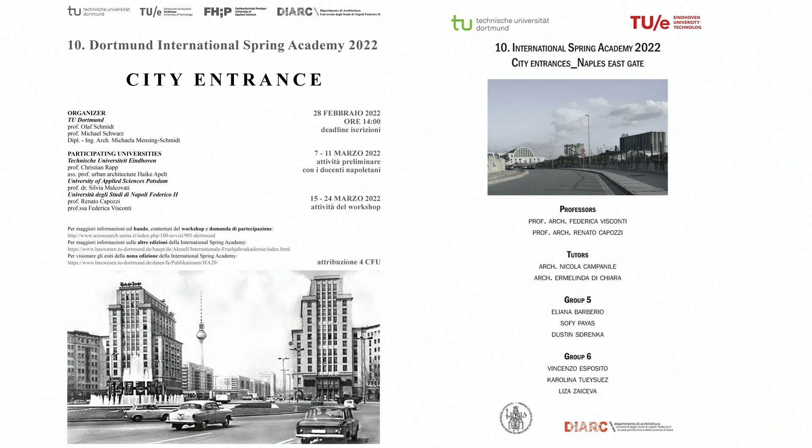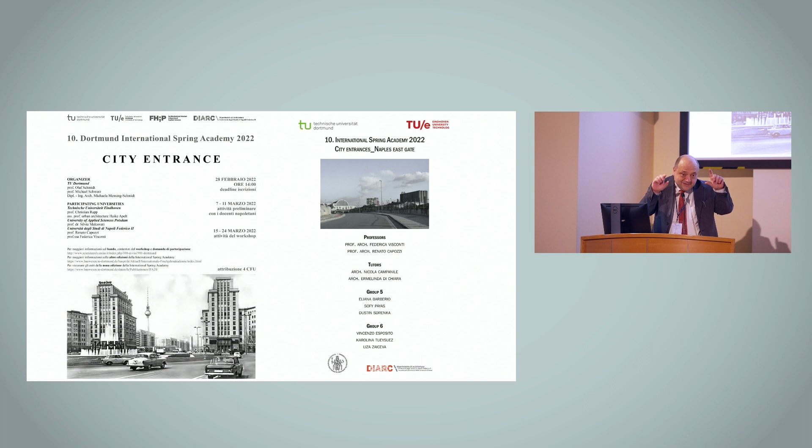These are really important urban themes. What is the door? What is the entrance of the city without the city walls? Krakow still has its city walls, so it's more clear, but a lot of cities have had their city walls demolished. Now what is the possibility to define, through the architecture body, through architectural forms, not through signage, a new clear entrance to the city?

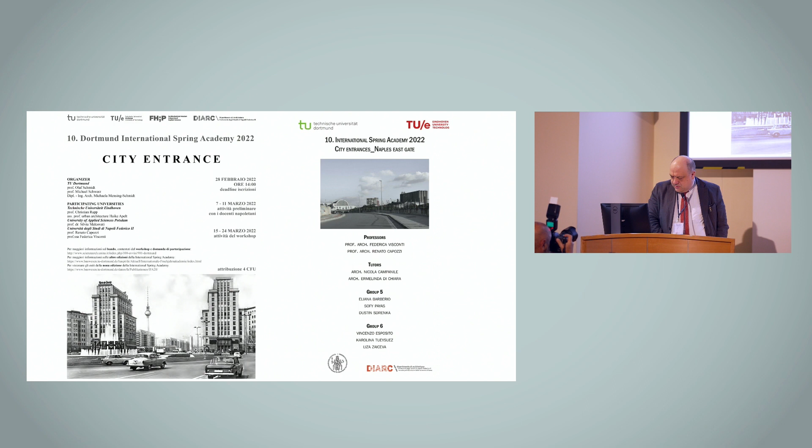This work is, in a sense, a work on the typology of urban facts. What is the entrance? We have a lot of possibilities to develop these themes.

I won't read the image on the screen, but let's look at this one. We have a lot of possibilities. We have an entrance with two parallel buildings, for example, that define in a way a door, big doors, or we try to work on different kinds of bodies, linear body and punctual body. It's not a conventional way to define the door of the city.

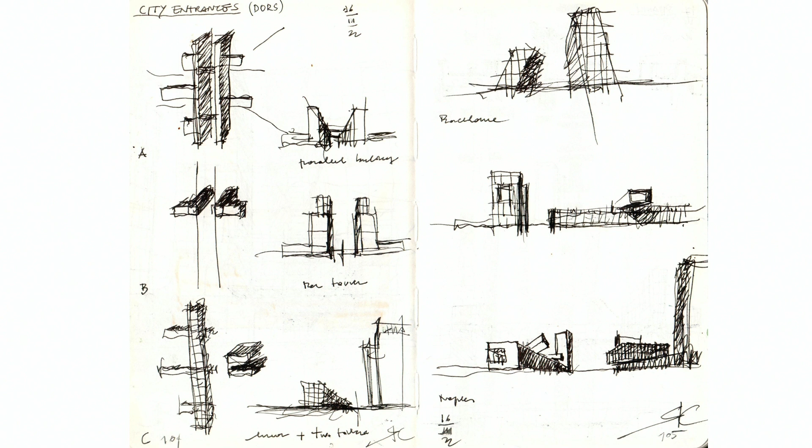We followed this possibility, the third one. We have some examples in Barcelona of what the door is, and what could be one of the doors of Naples, from the southeast side of the city.

We made a lot of use of historical maps of the city when defining a proposal for the city. It's very important according to us. This is an important map, the Duca di Noja map from 1775.

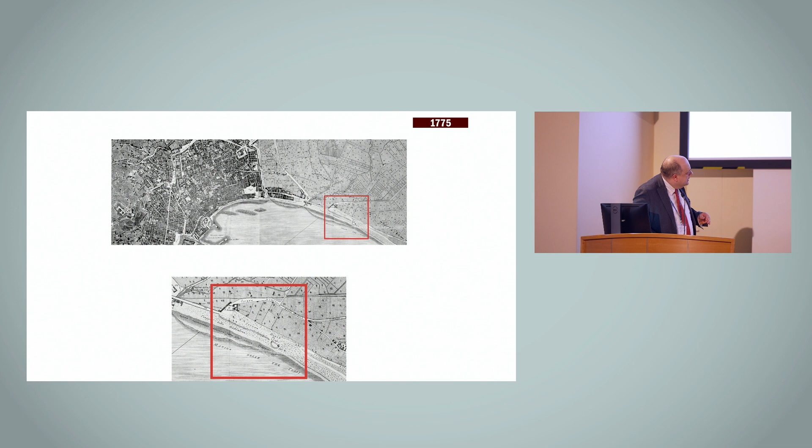In the area we worked on, there was no more than a field, a little church, and the coastline. But by 1872, we recognize the presence of this marvelous big building, 550 meters long. Very important because it defines, from the southeast part of the city, the main entrance to the capital of the Kingdom of the Two Sicilies.

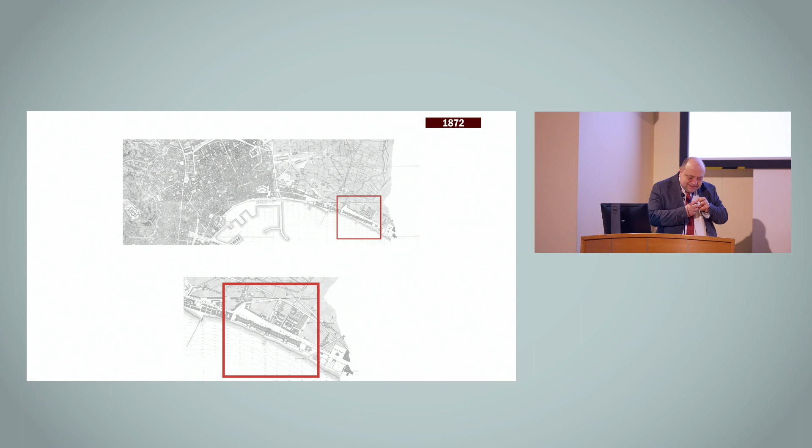It's also interesting to see the relation of this very long linear building with the church on another front of the street, a very important dense point. We have a long linear building and the church creates a point of tension between these two elements.

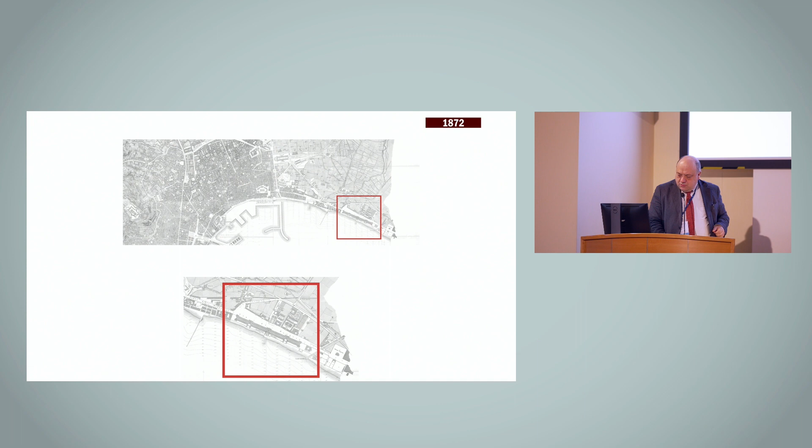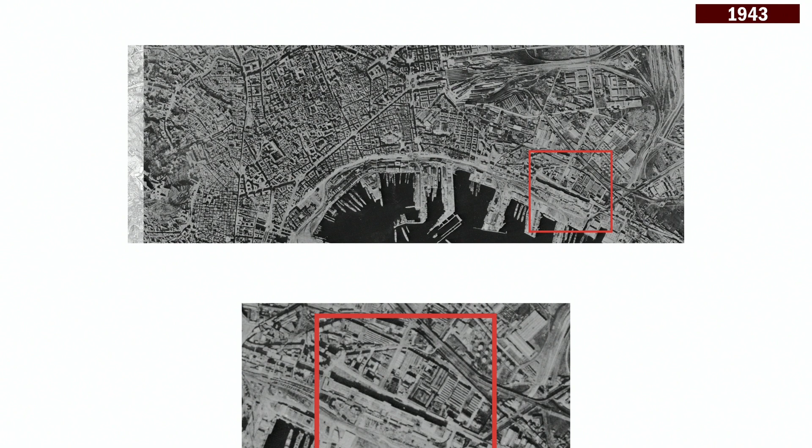And this is the image from 1943, during the last war. This building was destroyed by bombs, but not only by bombs. We can see here a zoom showing the relation between the very dense construction of the building, a wall system with arcades, and the church in front, in the middle of the palazzo or quartiere.

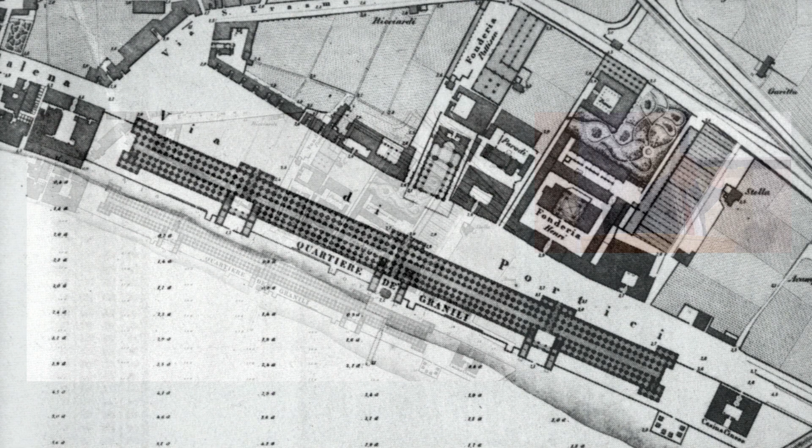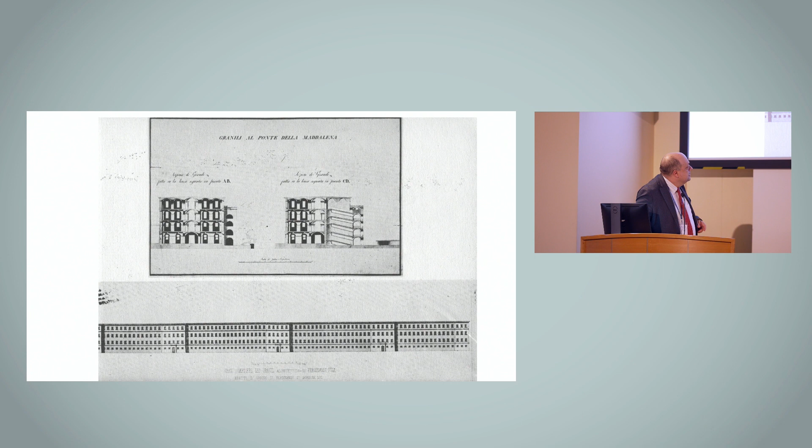Quartiere is a settlement, palazzo is a building settlement, but it's the same name, dei Granili. The front and section of the building, a very huge building, and some historical views. This is one of the pictures from the last century, showing the relevant presence of the Granili building in the landscape of Naples.

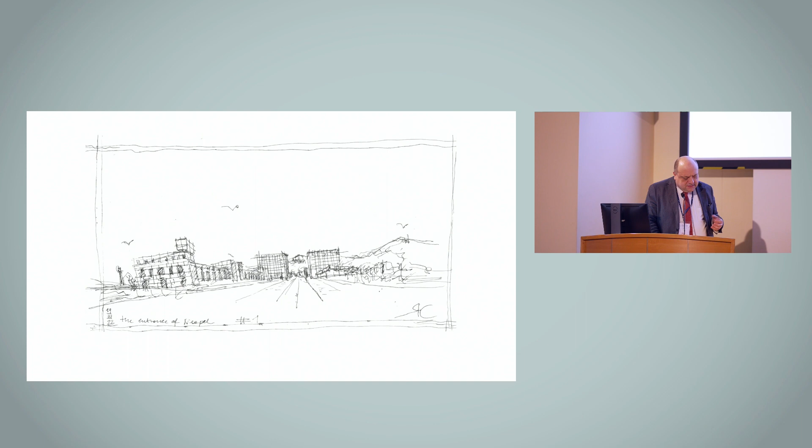The building was destroyed by the bomb, but not only by the bomb, because there was also the problem of many people living inside the building. The building was not for dwelling, it was for storing grain, and later for military use. We started with two possibilities: our idea is to try to rebuild this important relation that defines the limits between the city and the harbor, while at the same time defining the main entrance to the city.

We have two solutions, and I will show you both of them. In a way, the scientific effort is the comparison of these two possibilities. For the same problem, we have a lot of possibilities.

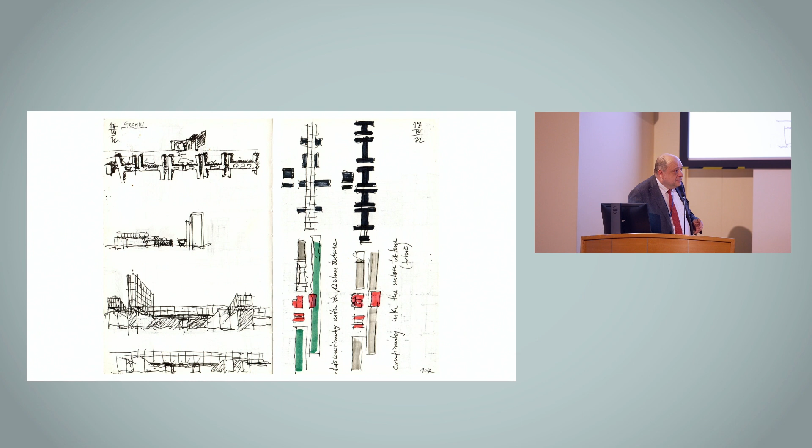This is a possibility more linked to the previous building in a way. The proposal is not to rebuild the building, obviously, but the syntax of the building is quite the same, with some variation. We can see the possibility to use the typological asset of the building to define a building defined by parts, a repetition of a single part, but homogeneous in a way, that defines two main courtyards, one in front of the city and one in front of the sea and the harbor. Some sketches try to explain this.

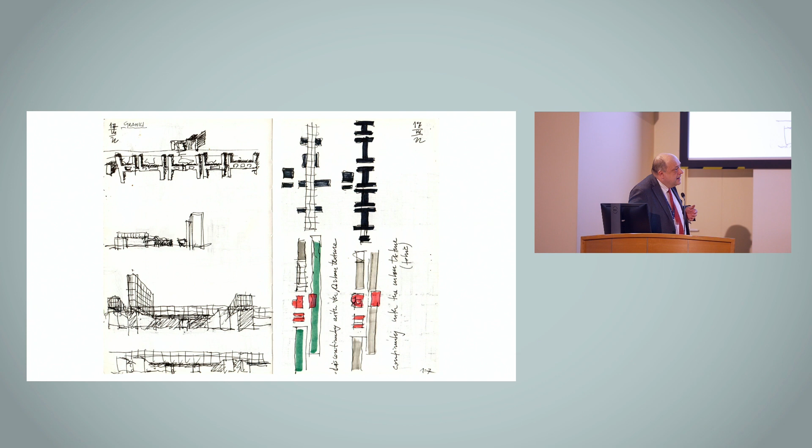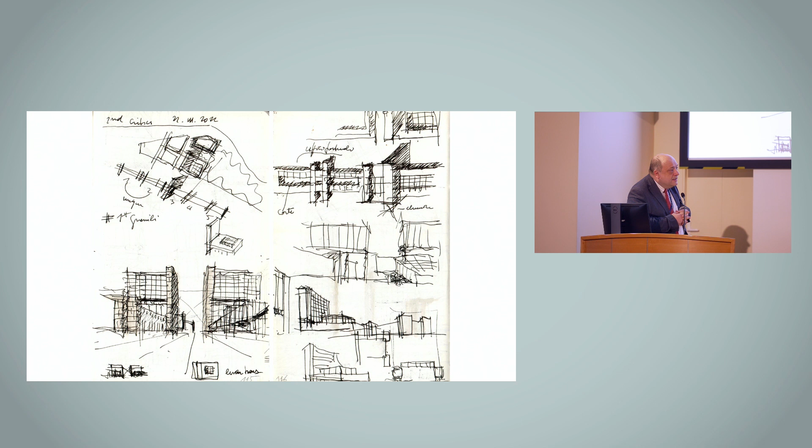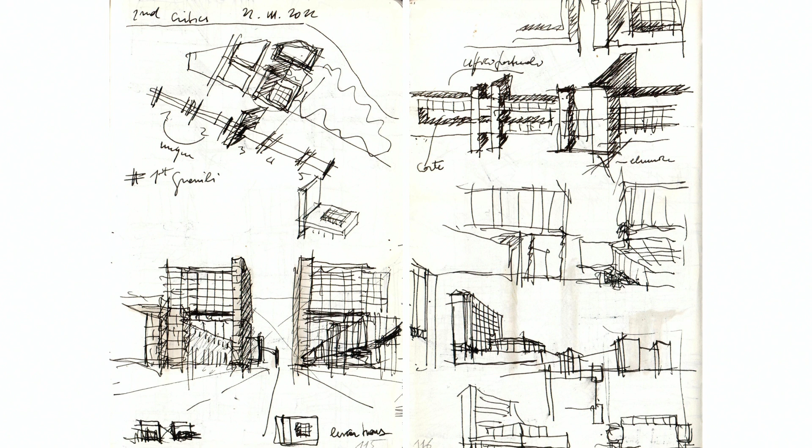The shape of the entrance, one of the orthogonal bodies for the services and vertical connection, can be a new tower that has a corresponding tower on the other side of the street, defining in that way the entrances.

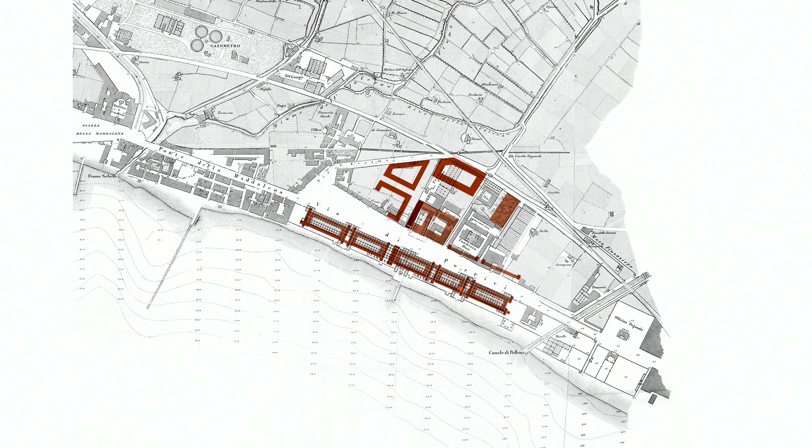This drawing explains the aims, I think. I use the same length of the building, and I find a sort of partition of the building to define orthogonal connections between the city and the port and the harbor. In the plan volumetric, one of these arms changes and defines the doors.

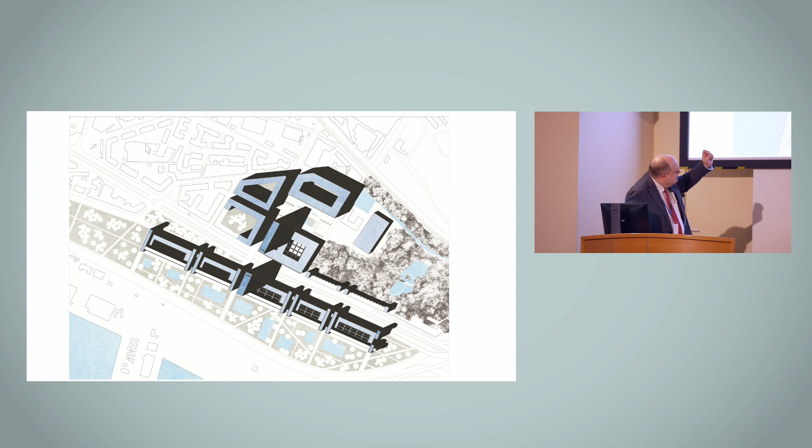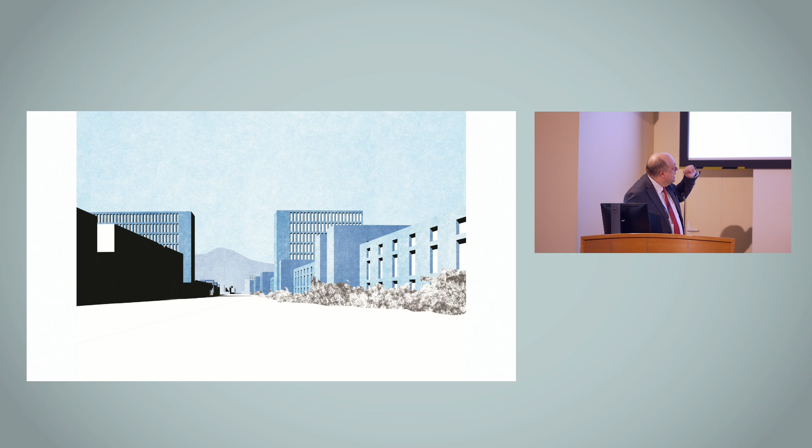An axonometric view to explain this possibility, starting from outside the city, looking inside the city, and the other vision from the city to Vesuvius. You can see.

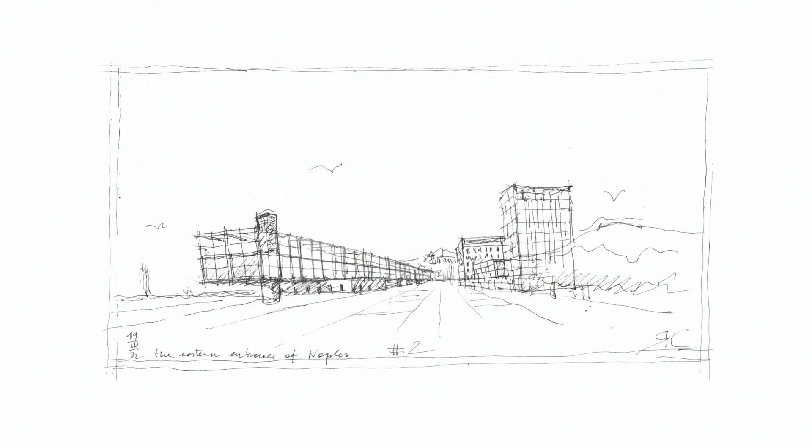The second one, I prefer the second one, but it's not important. It's a question of comparison. The second one is more and more linked to the previous, to the ancient building.

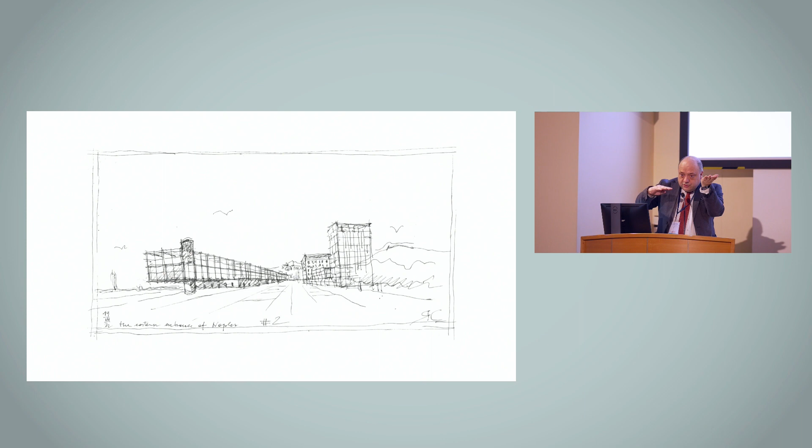The project of Granili is by a very important architect, Ferdinando Fuga, a Florentine and Roman architect well known in Italy. In this kind of proposal, it's a work of abstraction of the sense and the rules that this long building can nowadays have, as works for the city. The condition of the linear form is maintained, very important for us, but it is suspended to allow the relation between the city and the harbors.

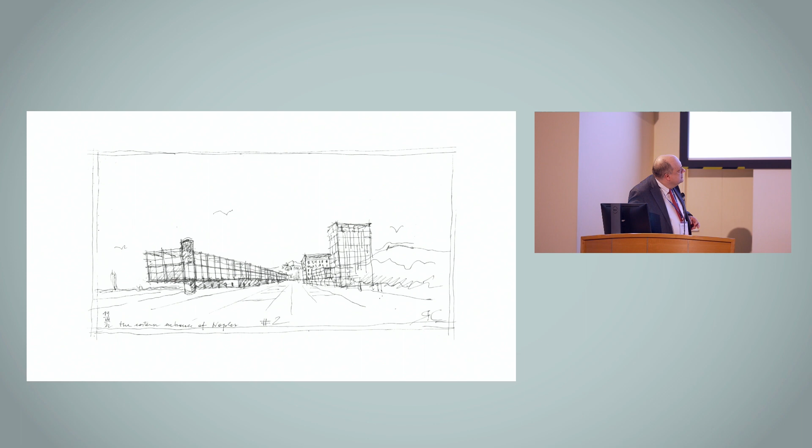We have another kind of coagulation of tower and platform, a sort of plinth - the German word, Sockel - to define the other side of the street. A lot of drawings explain in what sense it's possible to build a big suspended beam with some hits, some feet that touch the ground.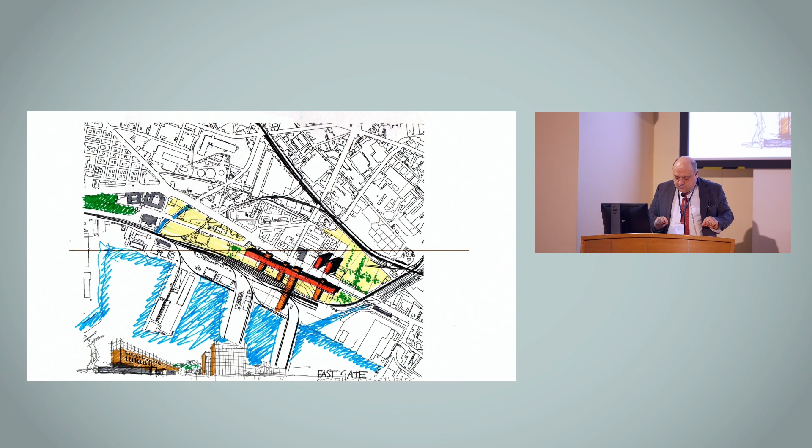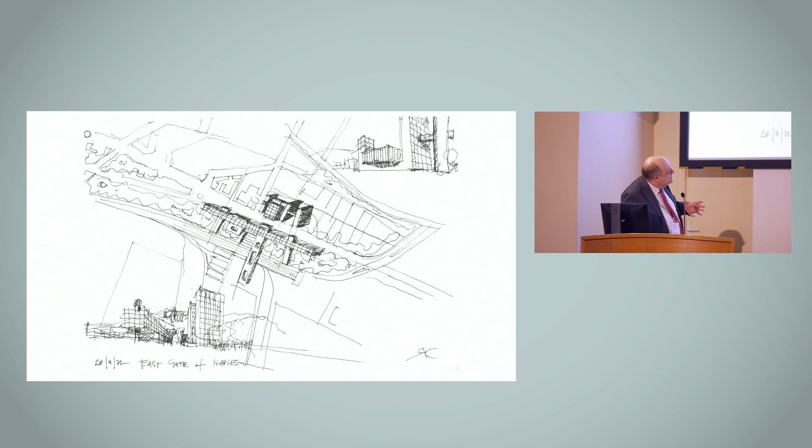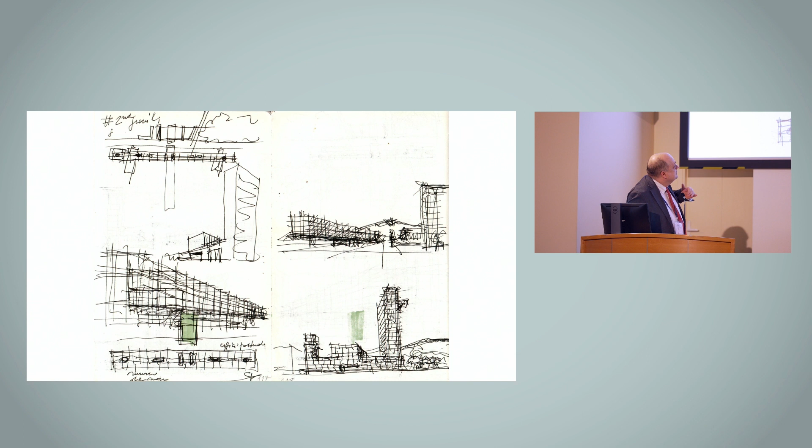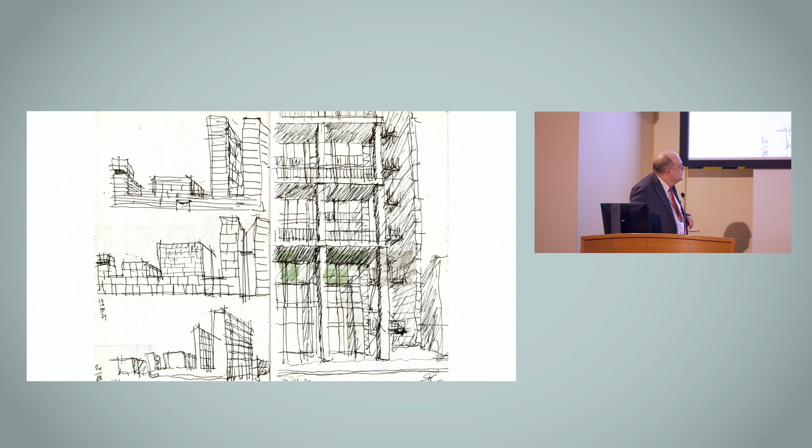A lot of sketching to find the right position of the transversal building and the proportion between the very long body of the new Granili and the parts that define the relation with the street orthogonally. The problem of construction, very hard to build a building of 550 meters. The length is the same, but we think it's adequate to the problem and the dimension of the harbors.

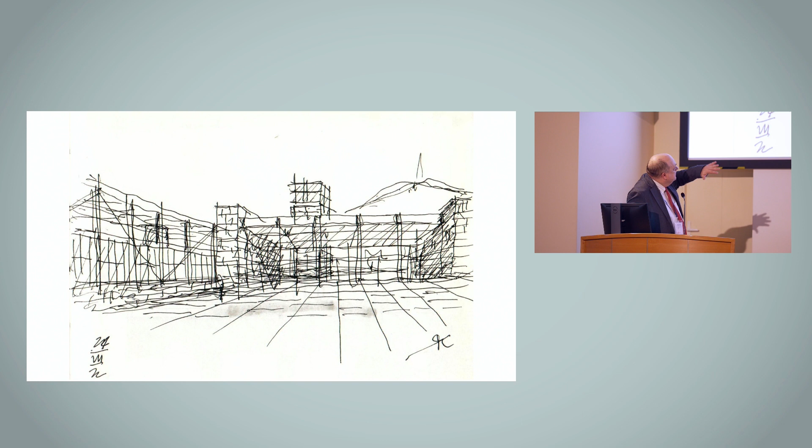This is a view from the plateau of the plinth, and we can see the building outside of the street. This is an interesting work to define a platform with, in a sort of archipelago.

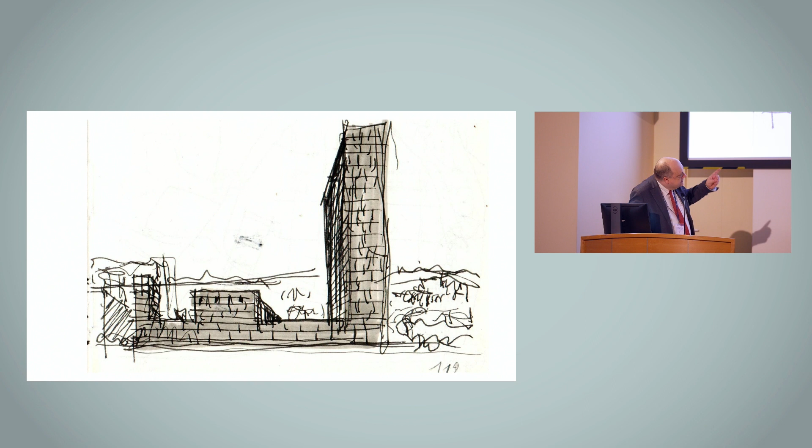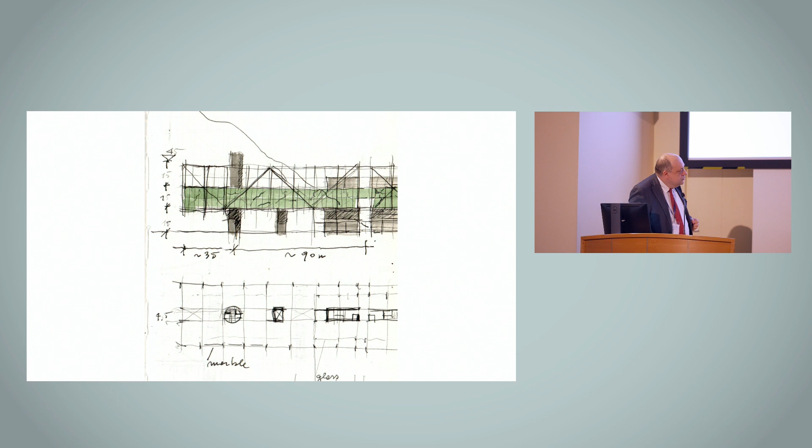I want to underline the dimension. We have a problem of proportion, but also a problem of construction, obviously, because there are few feet of this building, few pillars that are able to suspend the building.

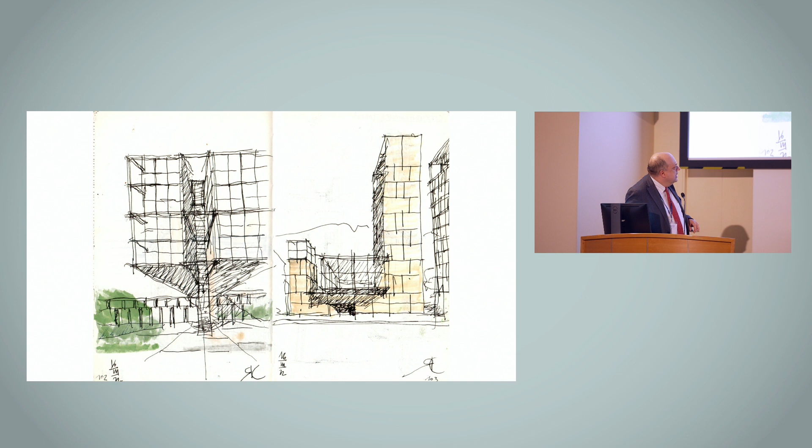One detail is the section, and the other points together in other sketching, but that's not important. This, in a way, is the aim, or the idea to define a sort of framework, in which the Sant'Elmo Hill is very important in Naples because it's the first element we can see from a fair distance in the profile of the city. In a way, it is framed.

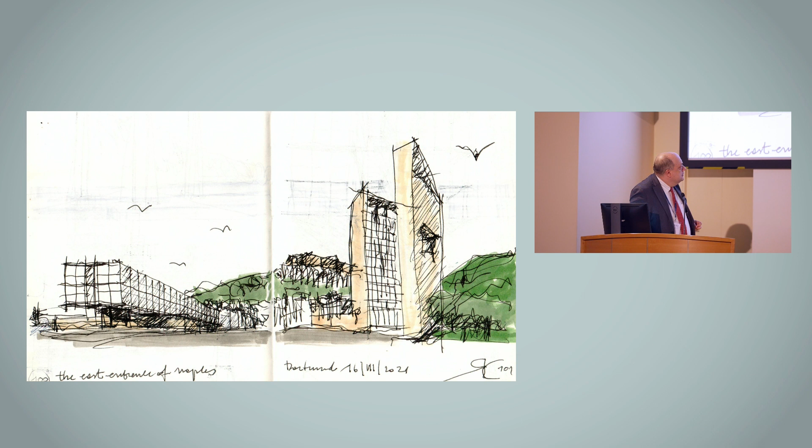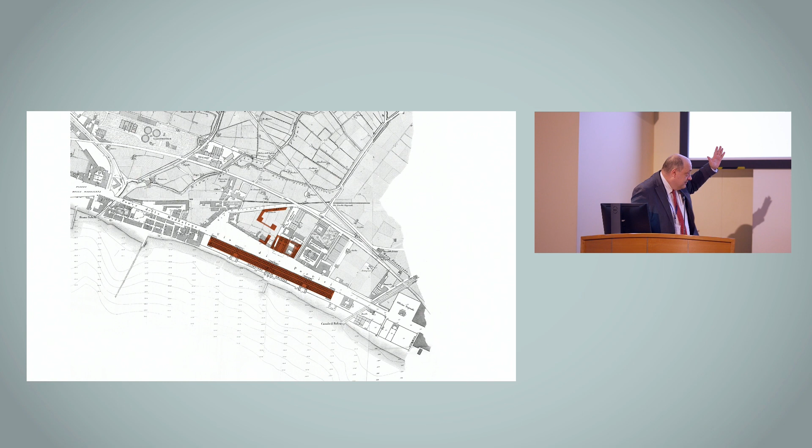The same drawing, the ancient map - the new building is really the same, it is not divided in this case.

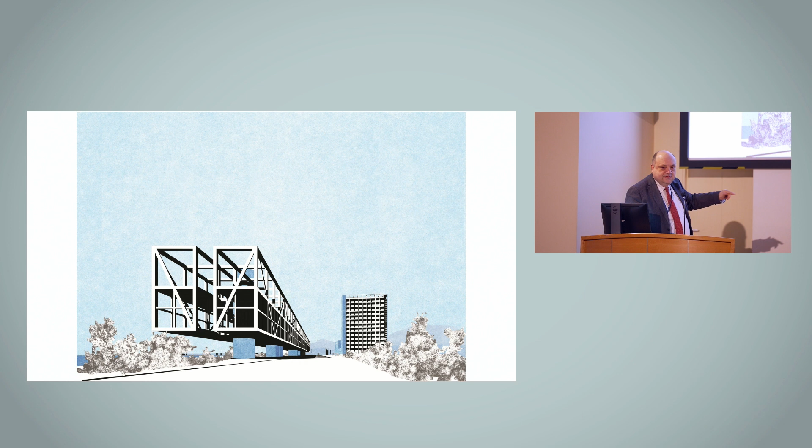Axonometry, from the east part of the city to the city, but we can see the sea at this level, and the final image. And I want to thank you for your attention.